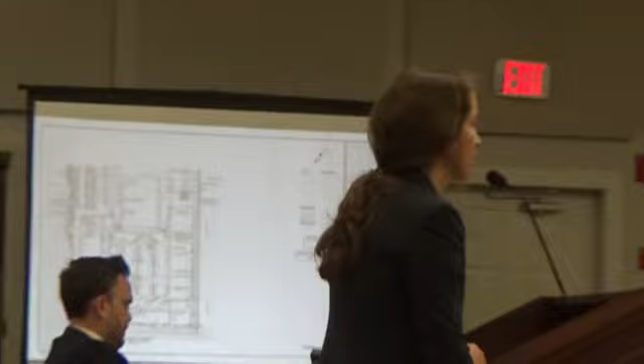For this configuration, the change comes with two-way traffic, where it was previously one-way, and immediately in front of the Kings retail, the parking supply is increasing by 31 spaces, but it's worth noting the 10 spaces counsel mentioned take into consideration ensuring that all spaces on the property, whether they are retail spaces behind that eastern building, are the minimum 9 by 18 foot space that we're seeking.

And so Afton, there we go. Now this is working really well. Okay, thank you everyone.

So Afton, just to recollect the board, we had previously presented parking spaces that were at a 45-degree angle, correct? In front of the shopping center? They were at a 60-degree angle. They were at a 60-degree angle. I'm not very good at math. Thank you for that. So they were at a 60-degree angle, and we have now modified them to be at a 90-degree angle, correct? That's correct.

And we have added now 10 parking spaces in front of the shopping center, correct? There's a net increase of 10 spaces throughout the property. And what else have we added to the shopping center in response to a comment from a couple of board members and I think also a member of the public? Yes, so directly related to the increase in parking supply, there is one added ADA space.

It's also worth noting that there are cart corrals. They're centered immediately in front of Kings. You'll notice them by a diagonal dashed line, rectangular in nature, removing 2 spaces next to one another in 2 different locations, adding additional places where carts can be stored independent of what is adjacent to the building where it exists today. So now we have cart corrals in the parking center. We have 10 additional spaces, correct?

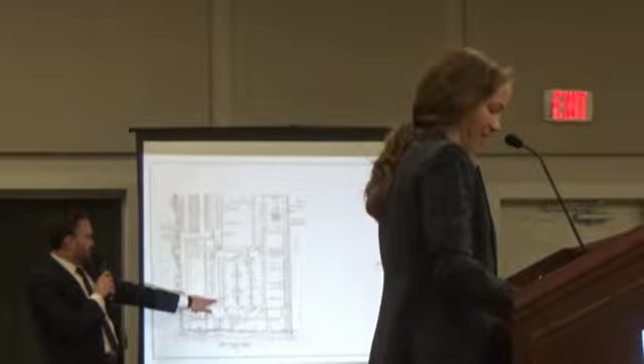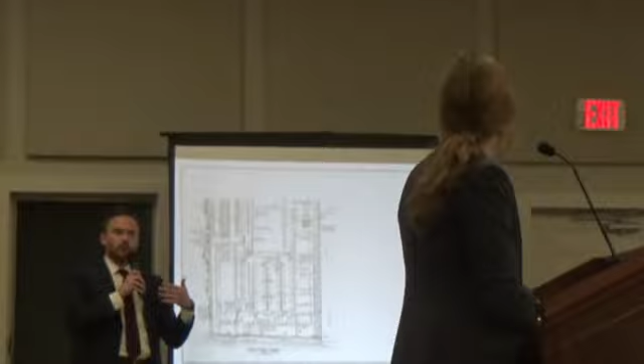The only other change, we heard feedback from the public, the board, as it related to traffic up the spine, or that interconnectivity from the south to the north. So we are indicating in that main drive aisle 2 traffic dampening measures. I'll be your Vanna White for this evening. This is right here off to my left. Right here we have a raised, what's the, a speed table. A speed table. There was a concern from the board, correct, Afton, regarding speed measures or traffic control mitigation measures that could be implemented in this drive aisle that comes off of East Main Street and goes all the way back to the center, correct?

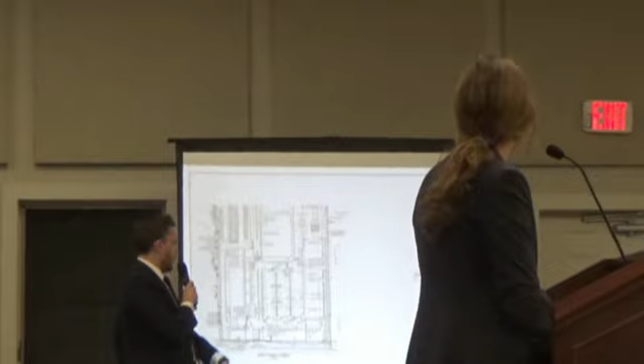That's correct. And the two things that we have proposed to implement are one, the speed table right here, correct? That is one, yes. Okay, and the other was a speed table right here, correct? That's correct. Okay, and this speed table at the top of the page here also connects to the pedestrian crosswalk that goes from the shops here to the shopping center, correct? That's correct. Okay, and we did that at the suggestion of the board and the public to just create some traffic calming measures, correct? That's correct. Okay, now, is there anything else you want to highlight for the board's consideration with regard to this sheet?

The only other thing I'd highlight for the board is the mirrored refuse collection for the western building. So similar to that of the eastern building, there is a centralized trash collection immediately north of the western building. And I'm looking at the plan sheet right here. Is this it right here? It is, correct. Okay, all right. So we have centralized trash collection containers for the retail buildings in the center, and that has allowed us to free up the ingress and egress routes on the eastern and western side of the center, correct? Yes, exactly. Okay, all right. So, Mr. Chairman, that's the brief update on parking, ingress and egress to the center that is new to this application.

We will be presenting or submitting a revised civil set, but at my advice, since we're not through the full civil set with the board, I said let's just present some exhibits and get the board's feedback on it. I just have a quick question. Yes, sir. You removed dumpsters from behind those buildings. What is the direction of flow of traffic? Is it going to be two-way direction or one-way?

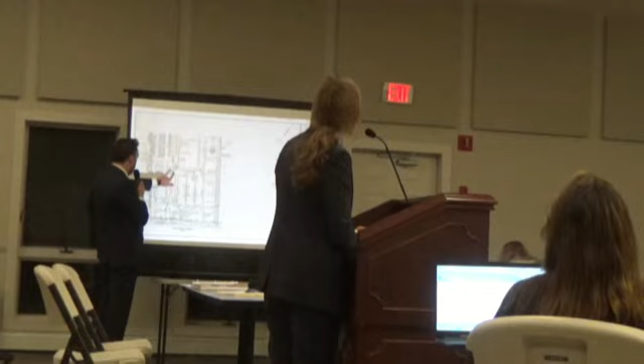And so I'm going to get a little bit more to your question. On the right-hand side of this drive aisle, that's just cars going in, correct? That's correct. And on the left-hand side, that's just cars going out, correct? Yes. And then what's the distance between the end of the parking stalls and the median there? To the edge of the median, it's 12 feet. 12 feet, and then what's the distance of the median? It's 5 feet. So we have a total of 24 feet plus the 5-foot median for cars to back in and out. Okay. And they're only going in one direction, sir. Okay, but they're going in and out in that open, correct? And there's one lane each way, right?

That's correct, sir. And you're aware that there's now 2 lanes out and 2 lanes in, the way that it's configured today? That's correct, sir. This would be an improvement to that. I'm not permitted to do that. Yeah. It's a public meeting. To go from 2 lanes to 1 lane? By law. I'll let my engineer speak to that. What do you have to hide?

So to answer the question as it relates to drive aisle width, again, the two-way traffic, the drive aisle width is more than sufficient, 29 feet. You'll hear from the traffic engineer on traffic patterns in terms of flow, the supply there. But again, in terms of the centralized access for the residents to make it in that northern direction, the 90-degree parking with the abutting cumulative 29-foot drive aisle does provide sufficient room for backing in and out.

Okay, and the people backing across the 2 lanes of traffic, which seem to me to be the only way to get in and out, that's not a problem? You'll hear additional testimony from the traffic engineer, which I think will help clarify how many vehicles are traveling through this spine or this drive aisle independent of the parking.

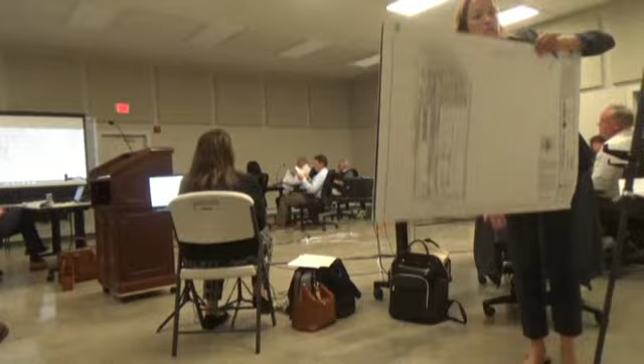And which sheet number is the drainage? So where we left off was on the grading plan. So where we left off was the grading plan, that is C-8 of the original preliminary major final site plan previously submitted.

And counsel mentioned drainage, grading and drainage do go hand in hand. The sheets are split in half, again with the first being that of the northern area, the second being that of the southern area. From a grading standpoint, the topography, as previously testified to, everything is flowing in the northern direction. You'll see that on both grading plans. Again, indicative even of East Main Street going onto the property.

Grading improvements, the majority of the grading is centered on that of the north, where the new buildings are being proposed for the plaza area to flatten out the area. In terms of the topography as it exists and what's required in order to do that, there are perimeter block walls. In terms of location, they hug the perimeter of the property, and they range in height. The maximum height along the western property line is 3.5 feet. The eastern property line is 6 feet, and that's in the location of the trash pickup. In addition,

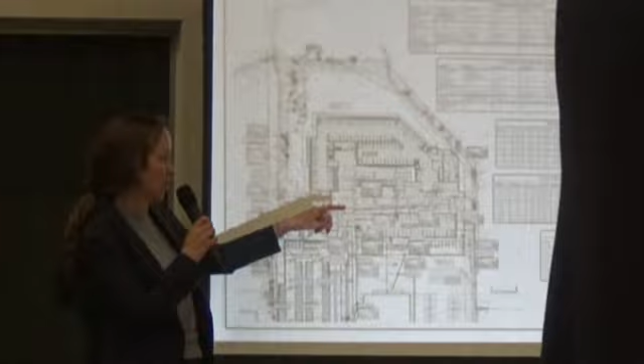And Anthony, I would just suggest you walk up to the sheet there and point that out while you testify. Sure. Yes. Thank you. So there are a series of porous pavement systems, and I'll try not to block anyone, that are concentrated in parking areas. To the west of the King's building, you'll see there are areas that are vertical. There's an area that's horizontal. Similarly, as we transition towards the front area, immediately in front of the multifamily building, you'll also notice there are rectangular areas on the screen indicative of porous pavement.

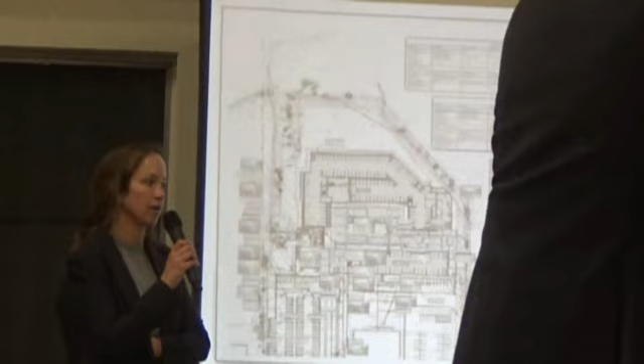Now, porous pavement, what it's doing is through the joints of the pavers specifically, it's helping treat that water, and then below ground there's void space to hold it and slow down the rate at which it runs off the property. Let's just take a step back. So the site, now, stay up there if you don't mind.

The site as it exists today in the rear, are there any stormwater management programs of significance back there? There are not, no. So when rainwater hits the site as it exists today, it is just simply sheet flowing in the direction of the topo, correct? That's correct. Okay, and so where does that water go today? Just point it. It goes in two locations, basically the upper left-hand side of the page or the northwest, and then that of the northeast.

Okay, and so with the stormwater management improvements that the applicant is proposing, we are now proposing to catch that runoff, correct? Correct. So hold it to detain it, correct? That's correct. And then to release it in a controlled fashion, correct? That's correct. And we're installing pipes and pervious pavers and other things of that nature to accomplish that, correct? Yes. And just to tell the board from the outset, this is all in accordance with DEP and Mendham Borough requirements for stormwater management, correct?

Yes, it is. Okay, so you just talked for a moment about what a pervious paver is, correct? Yes. And a pervious paver is just simply a piece of pavement through which water can flow, correct? Correct. And it catches particulates and it basically filters the water, right? And point out for me where it is that we're proposing to install that.

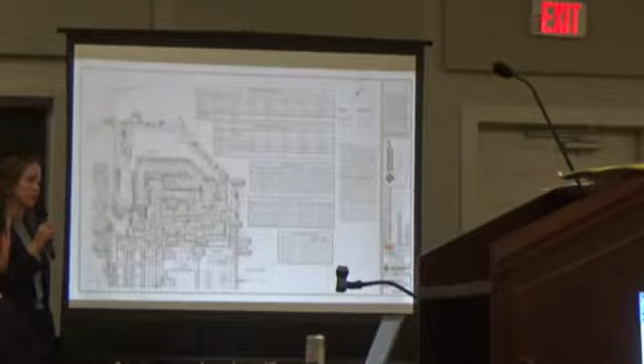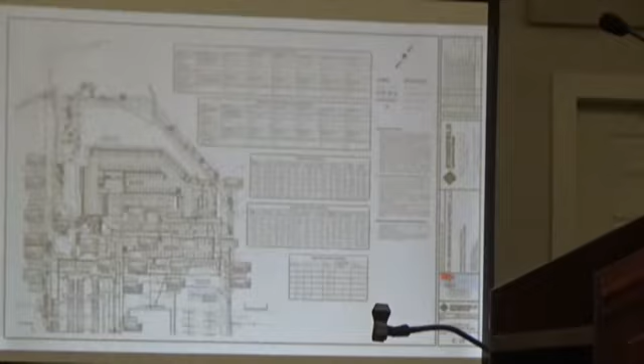It's a great question. And one of the state requirements is that of quality. So from a motor vehicle surface standpoint, the project is increasing, and we're required to treat that new motor vehicle surface. So the porous pavement system is doing that as well. That simply slows down the water flow, but what about some sort of filter system or something that contains those contaminants going out? Is there anything that is done for that specifically?

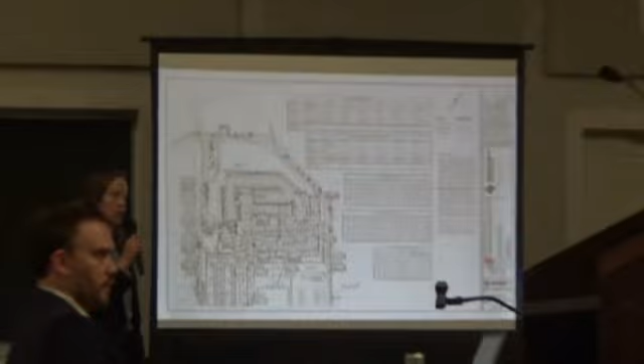So to answer the question, the material that is between the joints and immediately below the pavers is acting as a filter. It's a much finer material, which is helping settle out or remove any of those larger particles or anything that can't infiltrate below it. Or will build up over time, or how does that get cleaned

or remediated? As part of the application, as part of coordination with the board engineer, an operation and maintenance manual is required for all proposed stormwater systems, and that gets recorded with the county. So that holds the applicant to a recurring inspection frequency, not to mention cleaning regimen. They vacuum out the filters, to answer your question. Well, there are no filters. There is a requirement with porous pavement that it be vacuumed with a high pressure vacuum on a periodic basis to get the material out of there.

It's not cheap or easy to maintain, but it is a BMP that is approved by the DEP for water quality. And what would be the frequency of that cleaning? I don't know off the top of my head. It's at least quarterly and maybe monthly. I'd have to go back and look. Depends on the specific type of system. Okay, so that seems the frequent cleaning, so. Yes.

And that manual will be recorded, I believe, Paul, with the chain of title, right? Yes. That'll be recorded for DEP requirements in the chain of title, so it'll be a recurring obligation of the property owner. So if I understand you correctly, you have to do a report to EPA every time you enact it? No, that report goes to the borough.

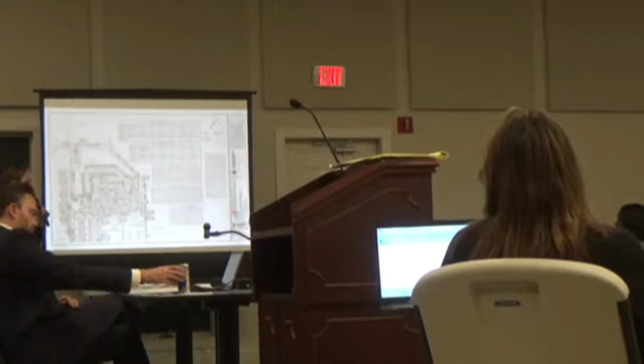The specifics of the maintenance and when it occurs would be coordinated by the applicant to ensure that it's not impacting any traffic or site impacts. I believe one of the recurrences in the O&M is following a rainfall event too. So in those cases, that would be vacuumed out, again, ensuring that anything that's clogged is cleaned so that the system operates as intended.

Okay, I'm back. I'm sorry, I sat down for a second, I got tired.

Okay, so that was sheet C10. May we move on to sheet 11, which I believe is the southern portion of the site. Yes. Sheet 11, again, southern portion of the site where the parking area is. It's showing the angled configuration, noting that if it was revised to be 90-degree parking, some of the low points would be altered, but what it's doing is it's replicating the existing drainage pattern.

And so, Mr. Chairman, we just didn't update the full civil set because we haven't gotten through it yet, but we would update it once we get through it. So there will be an updated submission, not hiding the ball here, we just didn't plow our way through it. Thank you. Okay, thank you. So then, we have a sheet that doesn't reflect the latest exhibit, but in terms of drainage, is there anything modified with the updated parking layout with the 90-degree parking stalls that impacts drainage?

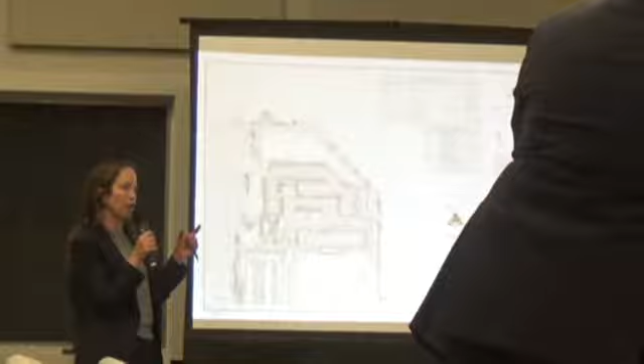When you say lighted, not counting the decorative ones, what kind of light are you talking about? So pole light, meaning the fixture itself is mounted to a vertical pole. No, what does the head of the fixture do? The decorative, but I want to know what the other ones are. Good question. So pole lights, there are 2. One replicates the lantern style required per ordinance that you see in the front of Kings. The second is light fixture A as indicated, which is more of a metal gooseneck, if you will, attached to a pole.

And the lighting complies with all ordinance requirements, correct? Yes. And it doesn't spill over the property line, correct? Correct. I do have a question. Yes, go ahead. A question about the lighting spilling over the property line. You're saying it doesn't go past the foliage here, but what happens when the leaves are down? Is there anticipated permeation through that area to neighboring properties on the west?

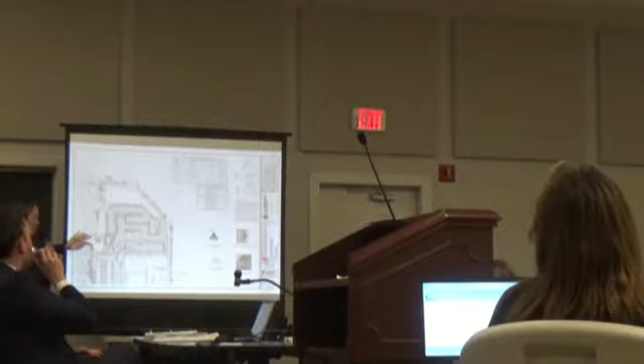It's a good question, and I'll clarify my statement. The lighting patterns measured on the property don't account for any structures beyond the building. For reference, there's a fence in this location, and whether they have leaves or not, there are plantings along this area that help dissipate light. None of that is modeled. The lighting on the plan, which has very low, nearly 0 values at the property line, is conservative in nature. And what kind of fence is that? Is it chain link, or a type that could block more lighting?

So the fence, and I'm just going to consult my notes, I know the record has it from prior testimony, I want to ensure it's consistent. The fence is located 10 feet off the building, and it is a coated wooden fence. Okay, like a solid stockade fence would be? It'd be solid in nature, meaning there wouldn't be any openings. And that height is what, 6 feet?

Or 4 feet? I believe it's 6 feet. Yes, it's 6 feet. Okay, and the height of the light lanterns on the other side, you know, the 10 foot from the building, what is the height of those lights?

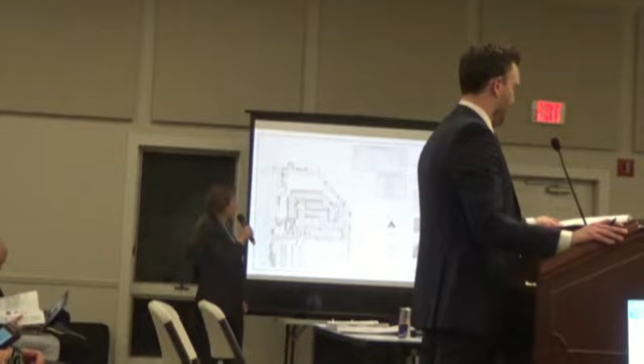We do note the plans as submitted indicate 2 pole lights by the amenity deck, or that of the pool, which will be removed. We understand that those being mounted at 15 foot relative to the pool area, we can better coordinate a bollard or something lower for the amenity area specifically on this western side. Additionally, the pole lights are mounted at 15 feet in height, where 25 feet is the max requirement. And then the building lights are mounted just over 9 feet or 9.33 feet along the perimeter of the building.

Again, all of these lights are LED, they're downward facing. We know the temperature of them is all proposed to be that of 3,000 Kelvin. I know there was a comment from the board professional as it related to 4,000 versus 3,000. We'll certainly coordinate to ensure that that's uniform. In addition, there are interior LED lights to the garage on a grid to ensure that there is an illuminance that is distributed throughout the property.

In terms of light trespass, the numerical values that you see on this plan are that of a unit of measure noted as a foot candle, a measure of light at grade. There is minimal light trespass as indicated along the western property line, that of 0.1 or 0.2. We note that the model as submitted doesn't model the fence, it doesn't model the vegetative buffer that exists along the property line. So no light trespass is anticipated as part of the project.

In addition, those decorative lights along the building for security measures, we'll coordinate with the board to ensure those that will remain on are indicated. And the overall lighting intention is to have uniform lighting. We note there's a comment as it relates to a couple areas being lower than the board engineer might like, which we'll certainly coordinate with them. In addition, on the western side of Kings, there are pole lights, those to replicate that of the lantern type fixture. Similarly, in the southern side of the Kings parking lot, there are lantern fixtures that exist today. They'll be relocated as required, but proposed to maintain the same aesthetic.

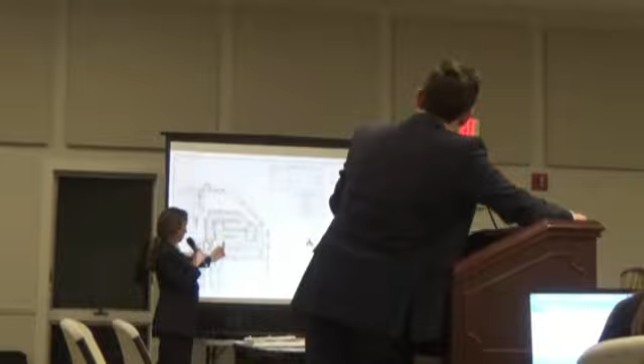So let's just take a beat. Why don't you walk up, if you don't mind, go up to the plan set there. We have essentially 3 or 4 different main types of lights here, right? Yes. So we have the A, which is indicated on the plans, point out the A. So there are 2 pole lights in this central area. Right, so we have the 2 pole lights there. Do we have a fixture detail on the right side of that sheet there? The A light? Partially, yes. So the A fixture will be decorative in nature as attached to the pole. Okay, so we have some mounted fixtures, and we have a couple of pole-mounted fixtures as well, correct?

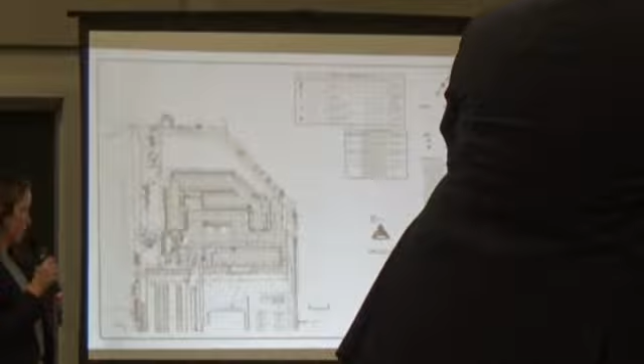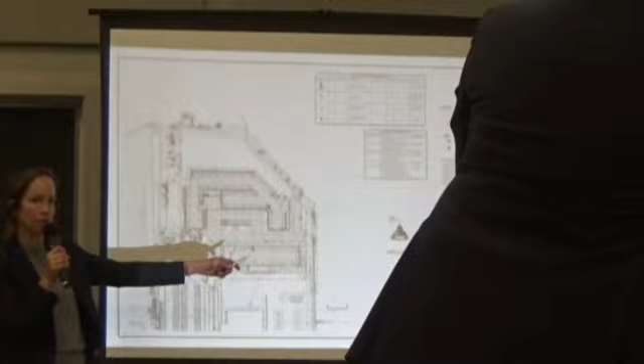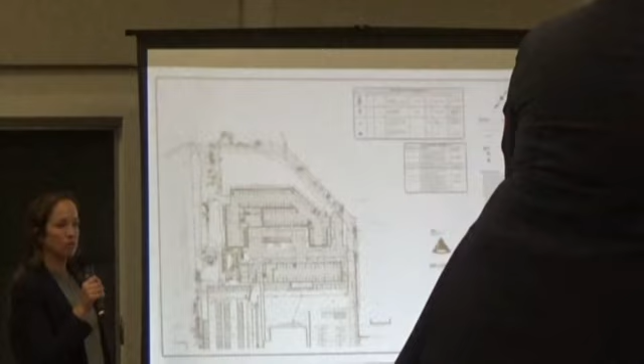Yes. So pole mounted are here. That's indicative of the A fixture, and then diagonally across the D fixture is also pole mounted, which will be located elsewhere in the parking area and the front. Okay. And so those are primarily designed to give light to the parking area, correct? Correct. Okay, and so we had originally located 2 of those pole-mounted fixtures, plan north, plan south of the pool, correct? Correct. Just highlight them right there, one there, one there. And we are now proposing as a condition of approval, should the board act favorably, we can remove those fixtures. And it won't impact the lighting distribution for the site. When you say pole lighted, not counting the decorative ones, what kind of light are you talking about? So pole light, meaning the fixture itself is mounted to a vertical pole.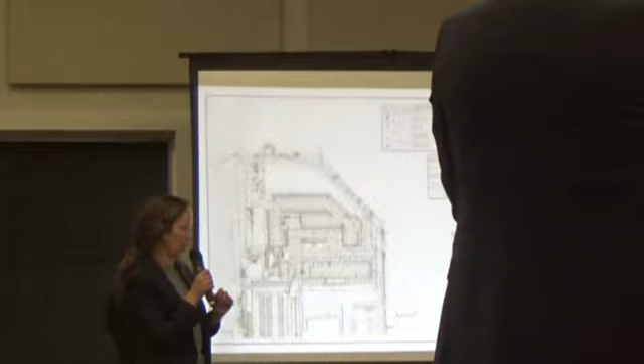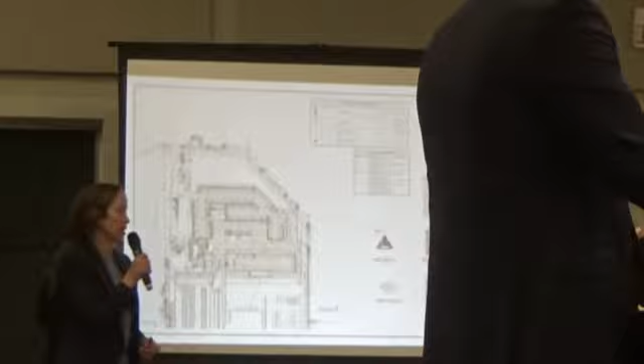No, what does the head of the fixture do? Yes. So there are Cobra light, what is it? No. So there are no... The decorative, but I want to know what the parking, the other ones are. Good question. Good question. So pole lights, there are 2. One that replicates the lantern style required per ordinance that you see in the front of King's. The second is that of the light fixture A indicated, which is more of a metal gooseneck, if you will, as attached to a pole.

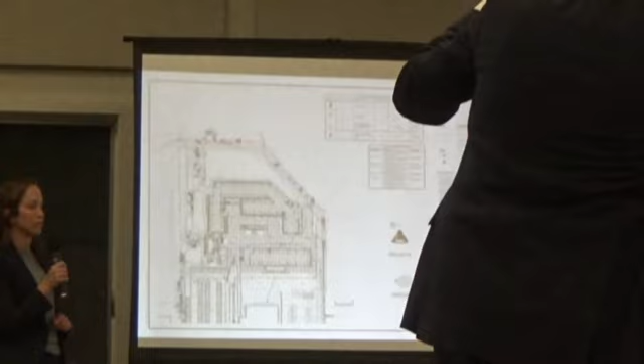And the lighting complies with all ordinance requirements, correct? Yes. And it doesn't spill over the property line, correct? Correct. Okay. I do have a question. Yes, go ahead. Okay. A question about the lighting spilling over to the property line. You're saying it doesn't go past the foliage here, but what happens when the leaves are down? And is there anticipated permeation through that area to neighboring properties on the west?

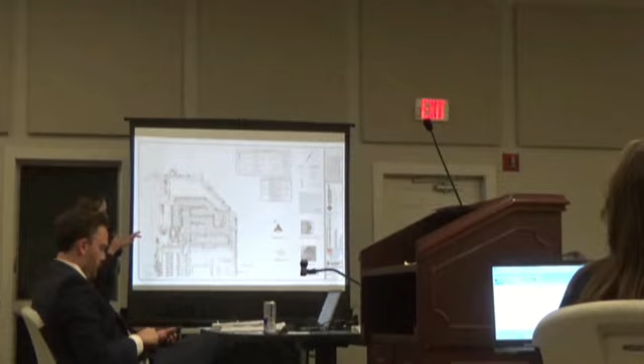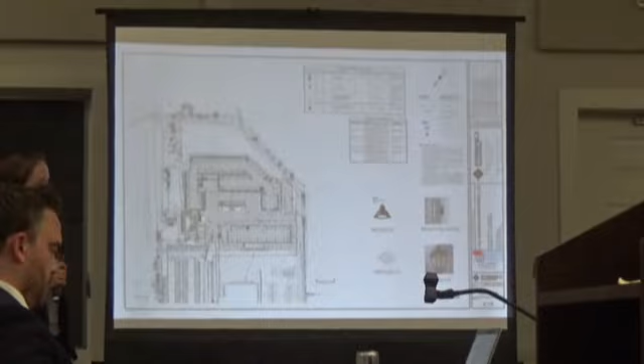So it's a good question, and I'll clarify my statement, which is when you look at the lighting patterns measured on the property, it doesn't account for any structures beyond the building. So for reference, there is a fence in this location. Whether it has leaves on it or not, there are plantings along this area that help dissipate light. So that is what I was clarifying, is none of that is modeled. The lighting as you see on the plan, which again has very low, nearly 0 values at the property line, is conservative in nature. And what kind of fence is that? Is that a chain link fence, or what type of fencing is that could possibly block more lighting?

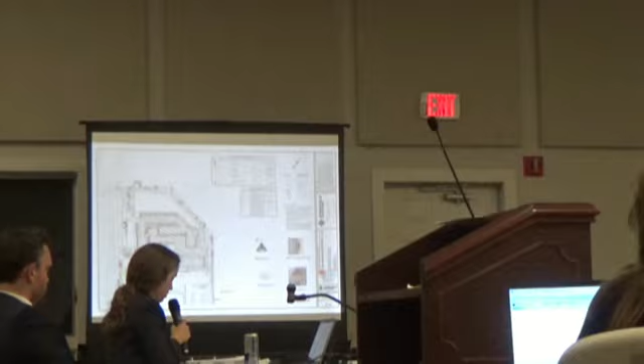Okay. And the height of the light lanterns on the other side, you know, the 10 foot from the building, what is the height of those lights? Good question. So in proximity, the light is a little bit higher. It's 3 feet higher than the fence, and as the distribution of the light works its way outward, it dissipates based on varying elements vertically. So the light itself is a little higher than the fence, but the at-grade measurement of light is impacted by the fence, ever so slightly. So you're saying that it might be shielded to the downward side? The testimony, or what I'm trying to explain, is that at grade beyond that fence, the light levels are impacted by that barrier.

I'm just asking, is there going to be a line of sight where somebody on a neighboring property to the west is looking out their yard in the dead of winter? Are they going to see a light bulb in their eyes? It's a good question. The heavy vegetation between that of the adjacent residences prohibits that visibility of these decorative fixtures. Again, they're 9 feet off the ground.

I just want to be clear about this, so everybody understands it completely. What's represented on this plan is the foot candle measurement at ground level, the amount of illumination on the ground. That's not glare, that's not the visibility of the source, that's the amount of light that you can see on the ground. 0.1 foot candles is very, very low. That's generally not a problem, and as stated, the fence is going to cut that off. But the question about, is somebody going to see a light fixture? Yes. There is no doubt that somebody from some location will see a light fixture.

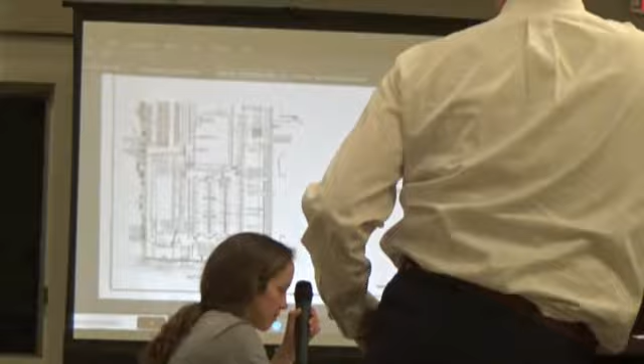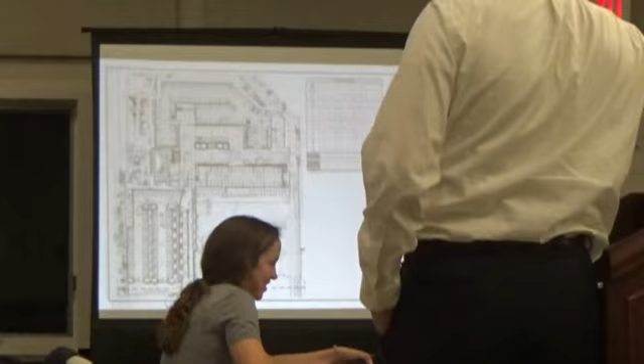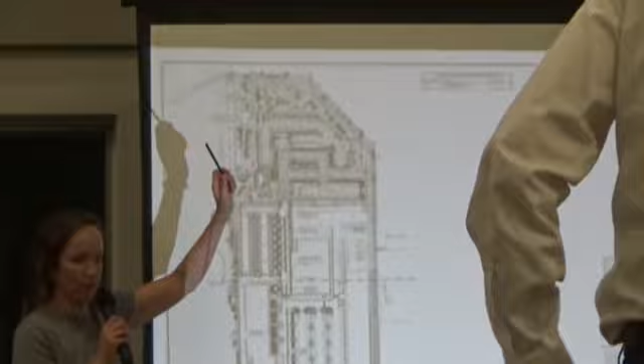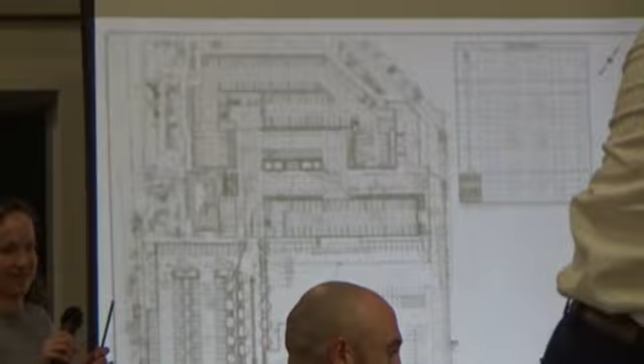Apologize, I'm struggling on the tech front as well. Yeah. I think the overall landscaping plan is the one you've got to pull up. There you go, and blow up on that. There you go. Bear with me, my apologies. That's the one we want to see, just expand it. Not in this mode. That one should work. We'll get there. Yeah, take your time. Maybe just work with that one that you had prior. That's the one. Leave that one there. Yeah, I can reach it on here and we'll work to zoom in. All right, we're gonna go with this. Thank you for the patience.

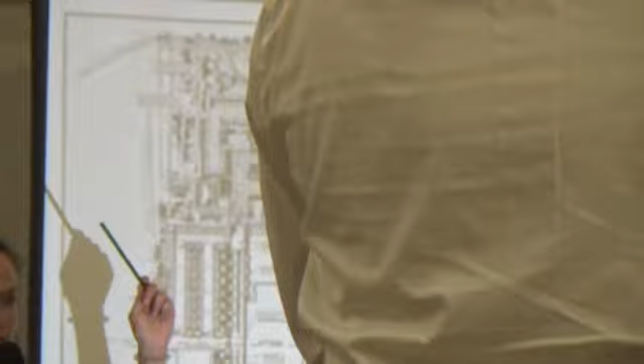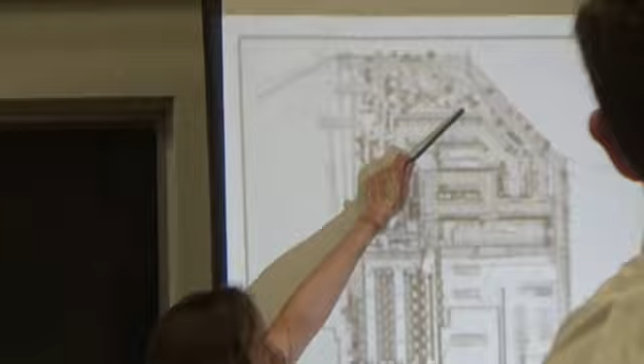The question pertains to the wooded tree line and then that of the proposed landscaping abutting it. So I'll trace in a counterclockwise direction where the existing tree line lives. You'll notice these shaded areas are that of surveyed trees. So the wooded line is the perimeter along the top of this area, and then it comes down along the western property line as well. And where is the proposed tree line? In the proposed tree line, you'll see a series of circles or smaller symbols in this area. All of this is proposed to be landscaping. Similarly, as you turn the corner again, this is an existing landscaping pocket where the roadway under existing conditions continued down here. Additional landscaping is being proposed.

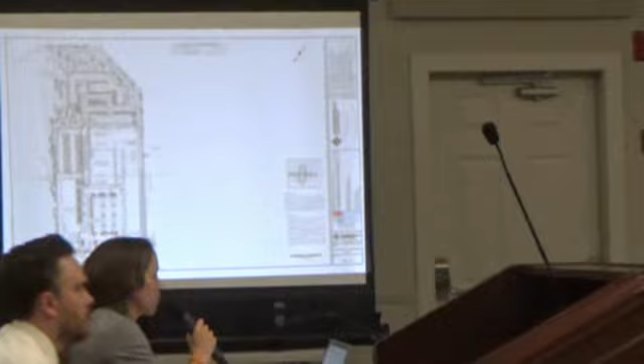Okay, thank you. I've got a question. Is there anything proposed to be added on the left side, all the way to the west? I see in the back, but there's no homes behind them. There's homes on the left side. Are there any plantings there to sort of screen the 5-story building from someone's backyard? So the existing wooded line does come onto the property under existing conditions, and the application is proposing to add additional plantings to that. In addition, when we think about the buffer requirement as it relates to this side of the property, the buffer width is substantial as it exists with the added planting proposed.

And the area that's in the north section, is that proposed to be utilized as an outdoor space or just an open space, not accessible? That's a great question and clarification point. So the area immediately to the north, as I highlighted with the pointer, is to be dedicated in the easement to the state. So that area is going to supplement the environmental features, and it will be part of an easement, so it will not be for recreational or open space use in that area. And that easement will be dedicated to the borough?

I'll confirm the specifics related to the easement, but it does get recorded and the borough is aware. Mr. Chairman? I thought it was part of our DEP permit that we recorded with the state, but I'll defer to Paul. Generally, those easements associated with permits like this are to the state. The DEP is the beneficiary.

I have a quick question. It's dealing with parking on A3. There's still 3 spots that are in a diagonal. Is there a reason for that? It's kind of near the CVS. Yes. In this location? Yes. So you'll see that is a one-way aisle as it continues in that direction. You'll also note that the aisle width here has all been contemplated to keep that as an existing condition, but you'll hear traffic testimony related to the parking spaces. Thank you.

Anyone else? Okay, I'd like to open this up to the public. Now, just a reminder, you have 3 minutes to pose your question. Could I suggest? I was just going to say, we want to do one section at a time. Otherwise, it's all done. Okay, that's fine. So, each member of the public would have 3 minutes to pose your question to the professional about the testimony received. Try not to deviate too far. And please state your name and your address. If you are protected under Daniel's law, you do not need to state your address. So whoever would like to come up from the public, step up and state your name. I would ask that you spell your last name for the stenographer.

Mark Vandenhende, V-A-N-D-E-N-H-E-N-D-E. Address? 11 Coventry Road, Mendham. I'll read my questions. I have hard copies for the engineer and for the counsel. Can you pull the microphone a little closer? Okay, drawing C3 demolition. Let me start with where you started, the grading plan. There's a test pit identification table shown on the drawing. However, there's no test pit symbol on the drawing legend, and there are no test pits identified on the drawing. Please identify the locations of the pits. The seasonal high groundwater depth varies from a shallow 1.3 feet to 10 feet. Has the groundwater table been met?

We spoke about the trash collection on both the eastern and western side. Well, my concern is the west because that's where MASH is. And my bedroom window, my balcony, borders right up against the parking lot of King's currently. So I'm envisioning, I'm sorry, I'm envisioning these dumpsters being right outside my window.

Visually, not appealing. I know for a fact that the trash is picked up at King's all hours of the night, like say 4 or 5 o'clock in the morning, which I would think is against noise codes, but maybe there isn't any in Mendham. But so I'm just trying to picture if this project succeeds, which I'm amazed that anybody would support it. I mean, how do the residents of Mendham benefit from this project?

But going back to the dumpsters, I'm going to be smelling trash, garbage all the time, trucks picking up the trash in the middle of the night. I'm already... Sorry, I need to ask a question. If this is a question period, so if you want to ask about the odors from the dumpster. Yeah, I mean, how is that not going to impact our well-being as residents of Mendham? Of MASH, I should say, it's Mendham Senior Housing. And I know a lot of my neighbors are concerned about it too.